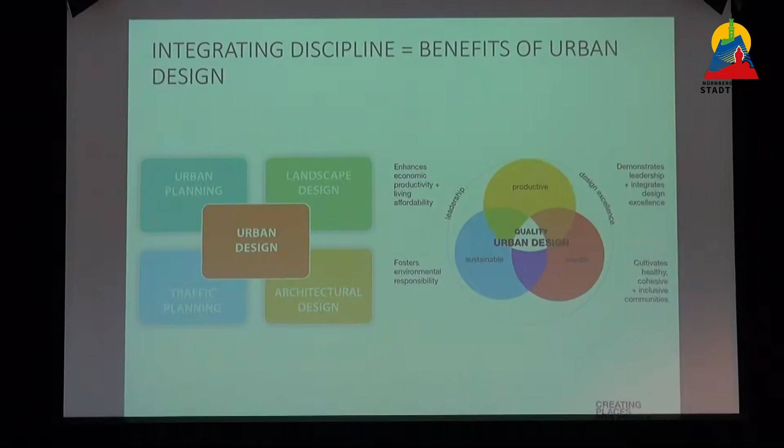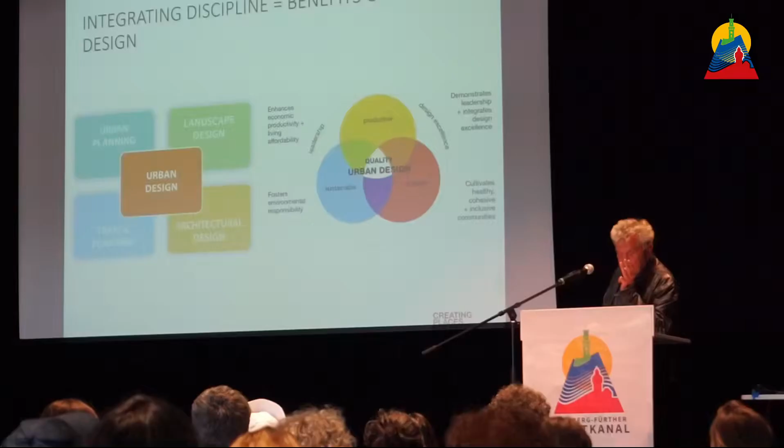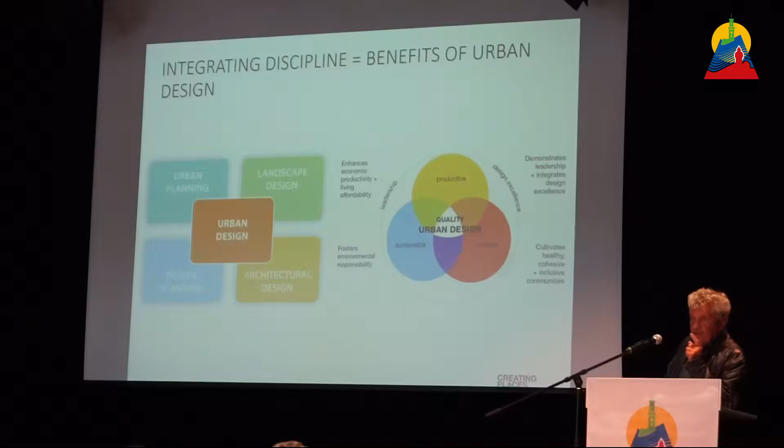So the approach to the restriction on car use in the city center of Ljubljana is specific. It's contextual, one can say. When considering the critical traffic situation, Ljubljana is still critical, you will see. There's a lack of an integrated public transportation system, which is different from Nuremberg, Fürth, for example. There are traffic habits, dependence on personal cars, the power of conservative traffic engineers, and on the other side, the ability of the community to accept changes, and of course limited financial sources, because Ljubljana is not a wealthy city.

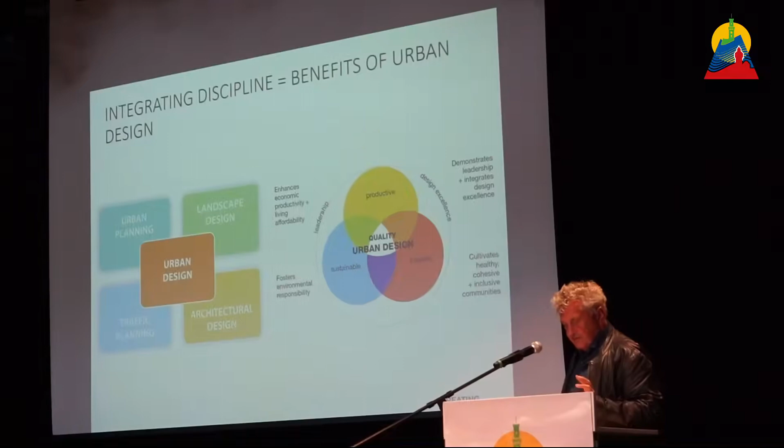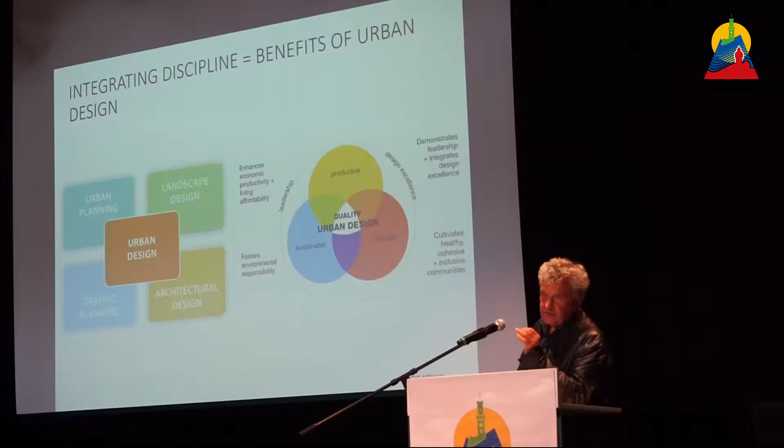So we are approaching the reform of the traffic system as a part of the renewal of the city center. So this is another goal, another aim. Our determination for this project was, and is still, based on believing public spaces are active surfaces that foster city life and urban transformation when they no longer serve only for motor traffic. So this is the precondition.

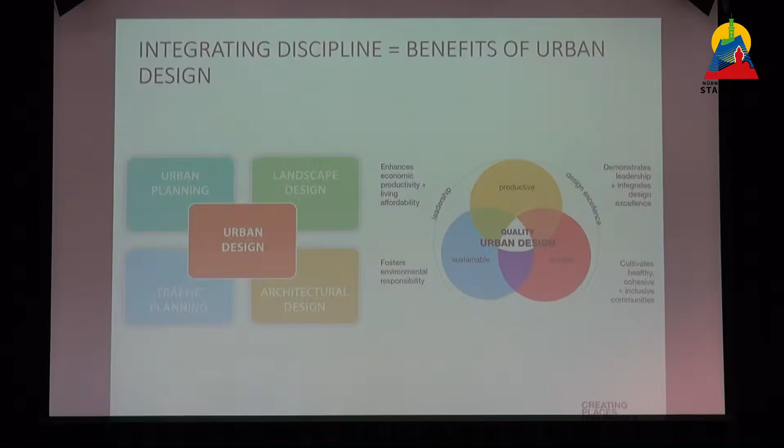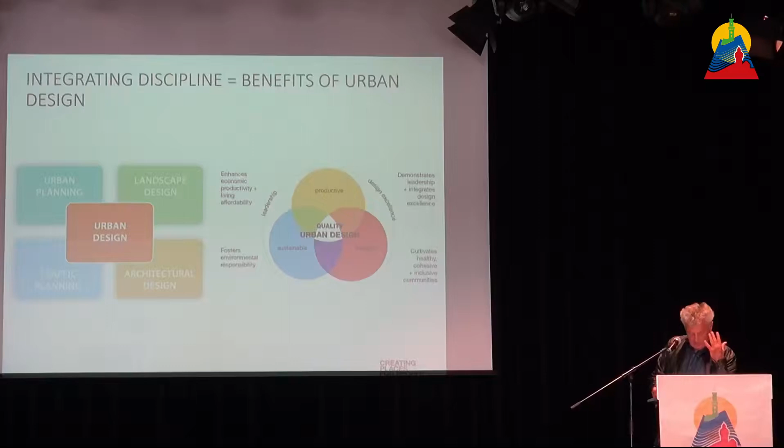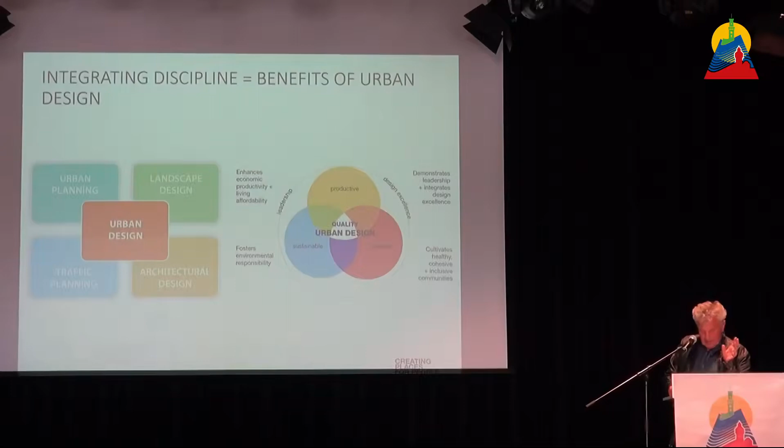To this determination, we implemented different urban design projects that have had an immediate impact on the traffic and consequently on the environmental situation in that place. So we are confident urban design is an integrating discipline that transcends planning and transportation policy, architectural design, development economics, engineering, and landscaping. Its scope is making connections between people and places, movement and urban form, and landscape and the built fabric.

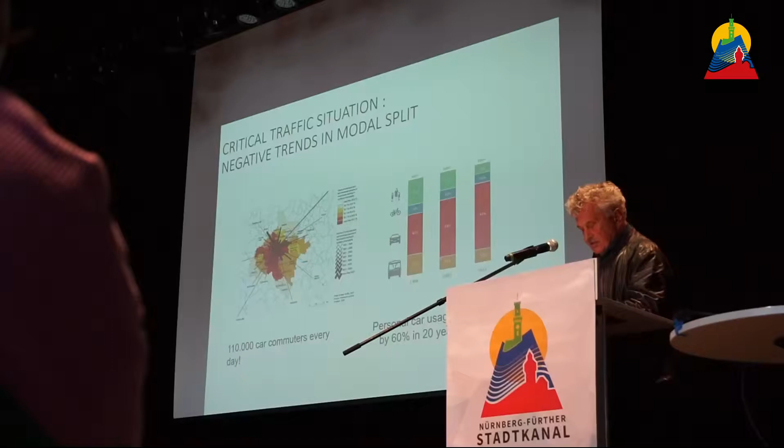So we are talking about placemaking, which is an approach to urban design that prioritizes people over infrastructure, thus creating a sense of place, by definition. Since urban design is therefore about the appropriate balance between development and conservation that is related directly to public health and welfare, we decided to use the rearrangement of public spaces as a catalyst for regeneration of the historical city center. So what is specific for Ljubljana?

The capital city provides the best employment opportunities and the largest shopping, leisure, and sports facilities nationwide. Ljubljana is therefore a large attractor for daily commuting to work, study, and shopping beyond the borders of the urban region. As a consequence, on average, around 110,000 cars enter the city, a small-scale city, every working day, whereas the peak number can reach 130,000 motor vehicles a day.

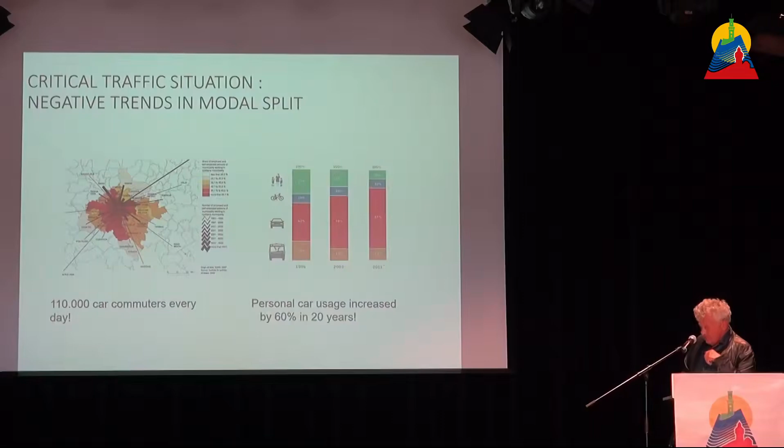So the critical traffic situation was the reason why the main strategic orientation of the municipal mobility plan, adopted by the City Council in 2012, aimed to turn traffic priority upside down, giving favor to walking and bicycling in order to balance the modal split, meaning that one third of trips would happen by personal cars, one third by public transportation, and one third by sustainable means.

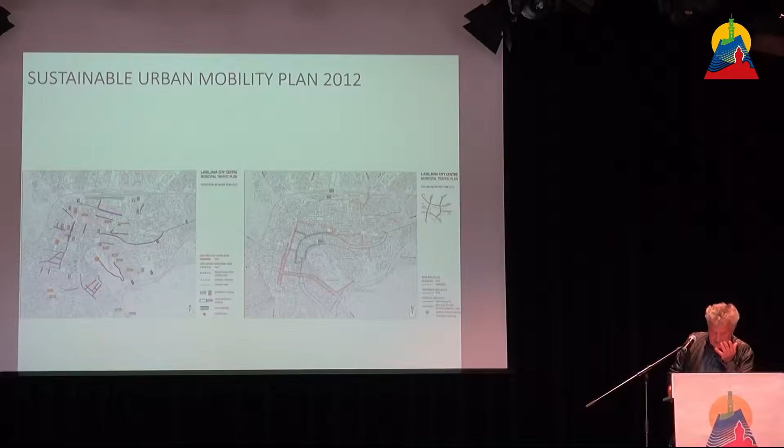So a systematic pedestrianization of the city center was a basic task and the most radical measure of the action plan, in which, as you can see here, 35 streets, squares, embankments, and other public spaces were designated as pedestrian areas. In 2017, the concept of a central ecozone, where the access of cars is limited, restricted, or denied, was revised with the support of this very important fact: environmental NGOs, not political.

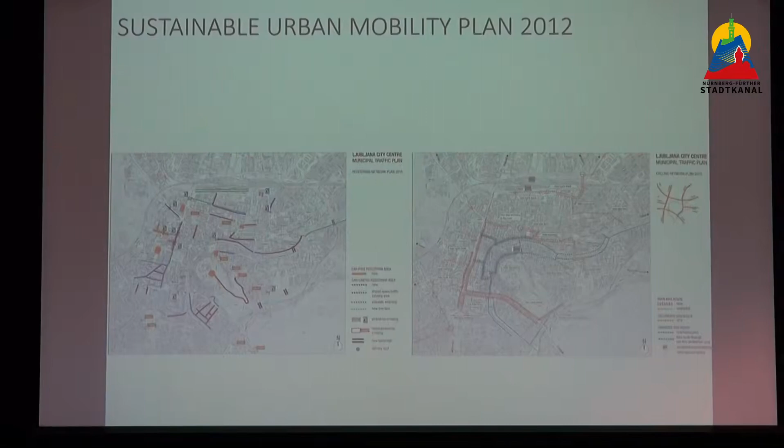This is maybe very interesting, even for you. This map shows the current state of different restricted traffic regimes in the area. In 10 years, namely, we managed to expand the central car-free or car-restricted area to 55 hectares. This is a huge ecozone.

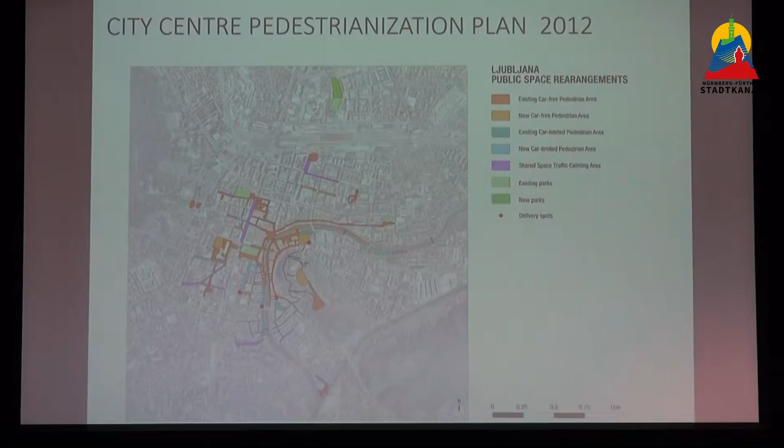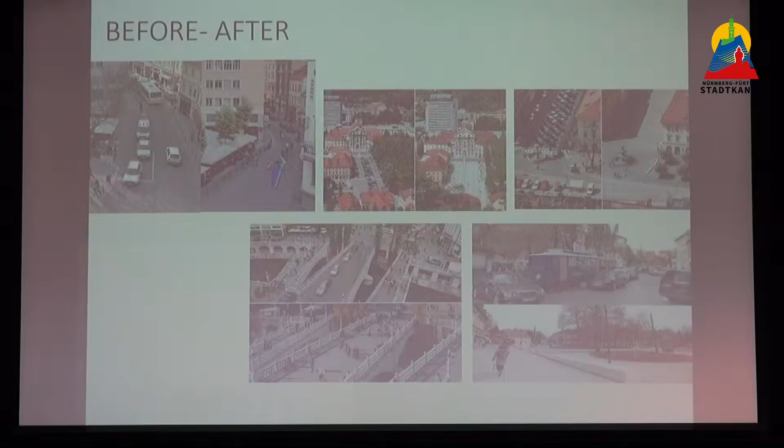These comparisons illustrate the drastic changes from previous critical traffic situations in the central area, where all the squares were completely occupied by parked cars, and even heavy city buses were passing the historic streets and bridges. The situation was really unbearable, especially for pedestrians, local merchants, and bar owners, not to mention traffic safety and air quality for the residents.

A precondition for restrictions: a new double-deck bridge was built to complete the inner city ring, allowing redistribution of incoming and transit motor traffic around the city center. This was a precondition.

This was the fourth project we realized. Circulating along the inner city ring, newly built garages allowed drivers to park there instead of entering the city center. This necklace of garages was a very important measure.

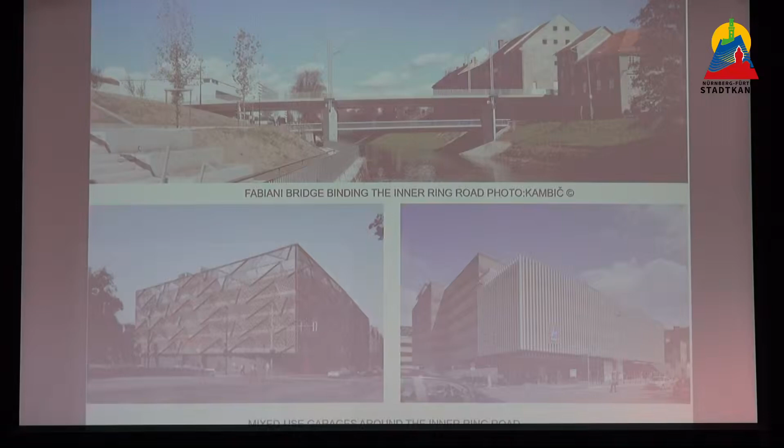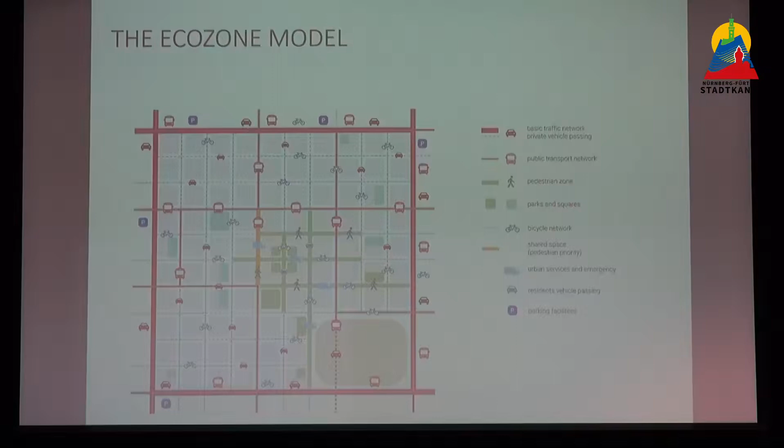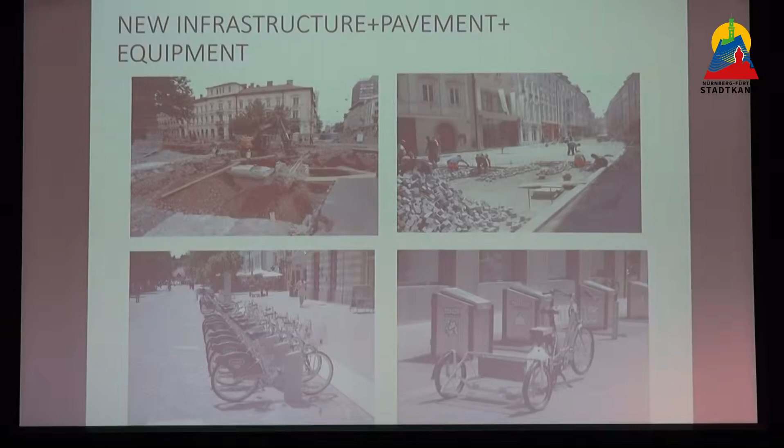After the inner city ring was completed, the rearranging of public spaces to pedestrian zones was followed by renovation of the complete underground infrastructure, including underground waste collectors, city bike infrastructure, replacement of paving, public lighting, urban furniture, and, importantly, planting new trees.

The rearrangement of reoccupied historic squares was carried out first. From the very beginning, we declared the network of pedestrian areas as a continual public space that pedestrians and cyclists could share, thus learning and experiencing cohabitation among them.

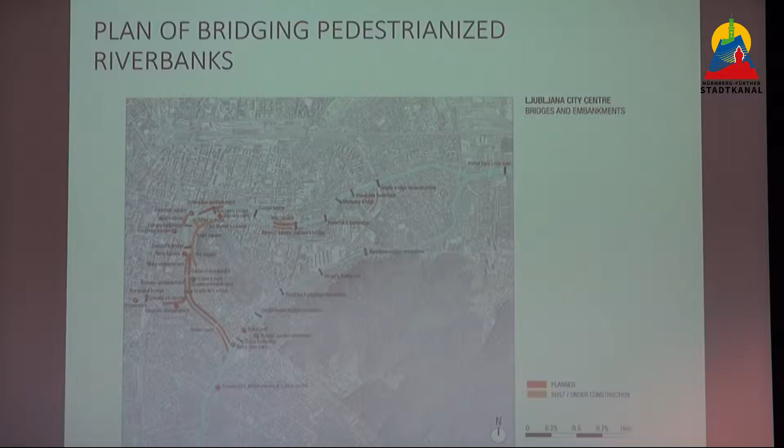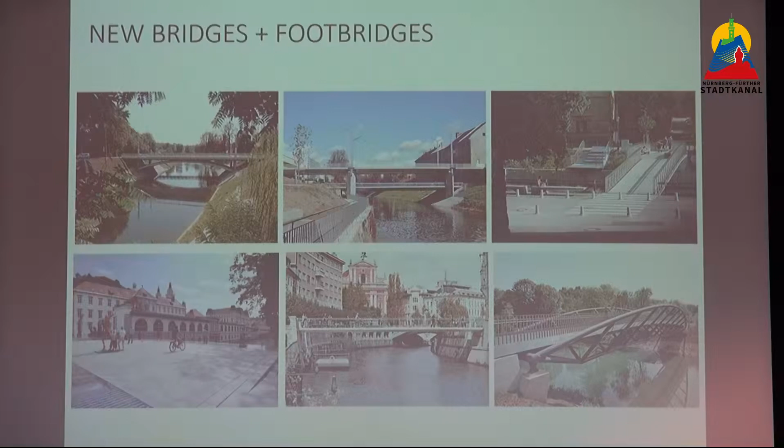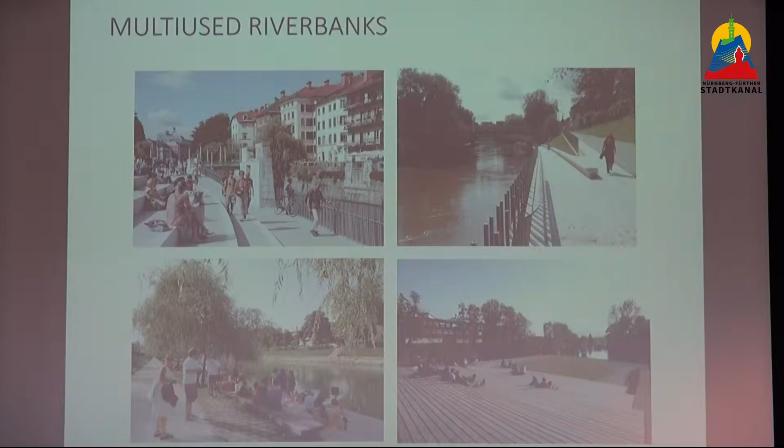Landscaping, planting trees and arranging parks along the river were part of the pedestrianization process. So you see some of the examples.

As expected, the civil initiative of inhabitants of historic old Ljubljana strongly opposed the restrictions on motor traffic regulation in the area, and demanded that the disputed decree, which closes them in a ghetto, not be adopted. So, regardless of the claims, the urgent situation forced us to start implementing restrictions, unfortunately, without the full consent of the locals.

It is not possible to reach full consent; it is utopia. It must be taken into consideration: the dependency of the community on cars on one side, and the critical environmental situation in the area on the other.

Regarding specific circumstances, we decided to implement measures step by step. This was the strategy, very pragmatic, in small portions, in small scales. Why? To give people enough time to test and adapt to changes from street to street, from square to square.

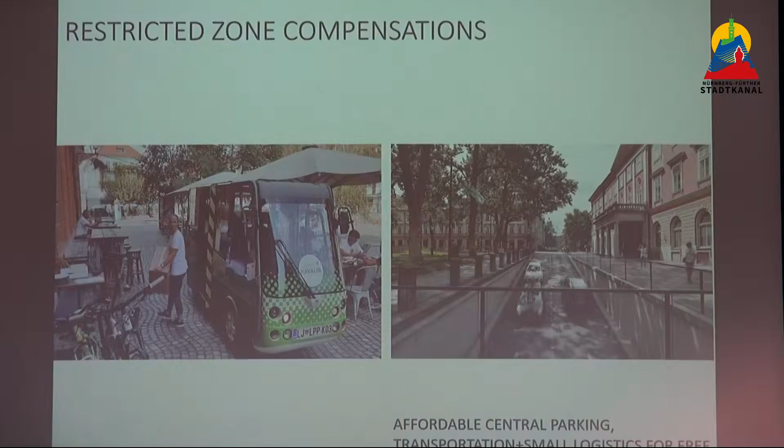To avoid people feeling deprived, we offered the locals some compensation for restricted use of their car. First of all, we enabled them cheap parking in a public garage we built under the nearby square. The price is one euro a day. That's cheap, no? In addition, we introduced an on-demand transportation system and small delivery service operating for free, on demand, within the car-free area.

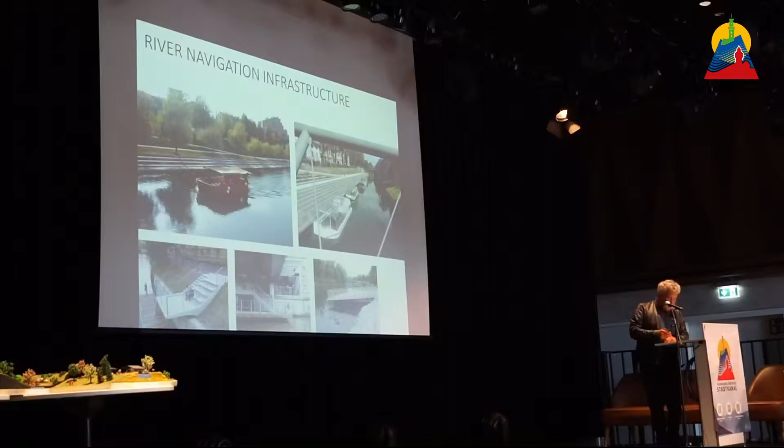This is, maybe, another compensation.

With the future public river transportation we plan to introduce soon, we also facilitate the locals within the restricted area. For this purpose, we built the main river port, as you can see here. It is small, of course, but it is the main one, along with boat stops equipped with platforms, gangways, and rafts, serving until now for tourist navigation.

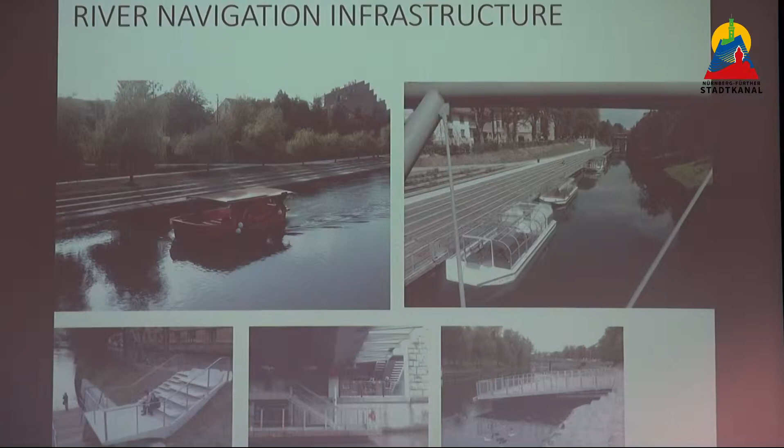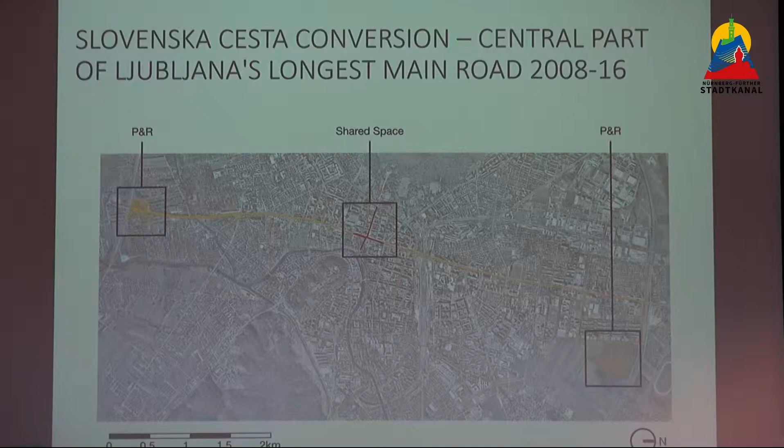So let me conclude with the presentation of the Slovenska cesta redesign story. Slovenska street occupies the central part of Ljubljana, the longest major road, and represents the main development axis of the city, stretching from the northern to the southern park-and-ride terminals on the highway junctions.

After many years of road widening and adding new traffic lanes, while narrowing the sidewalks to a minimal extent, the former avenue degraded into an ugly and polluted traffic corridor. Constantly decaying public life was the result of supporting the predominance of cars while completely neglecting pedestrians and cyclists on the street.

Narrow sidewalks forced pedestrians to use arcades or find different routes. Cyclist infrastructure was bad and disconnected, so besides its representative function, the street was dividing the most densely populated promenades passing through the city center to the Tivoli, the largest city park.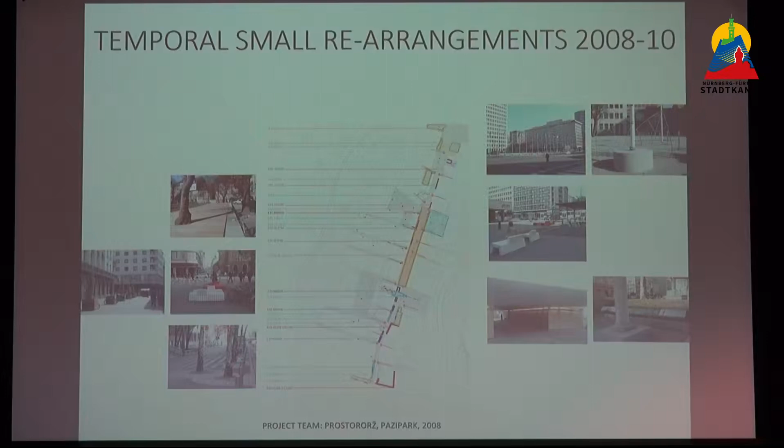From the very beginning in 2008, the initial small rearrangements were accompanied by staging of different street art events and social performances, aiming to prepare the people for the new shape, the new function of the street. So this is the demonstration method, not demonstrating, but demonstration.

With them, we tested how the removal of motor traffic generates reviving of public spaces, just the opposite of considering the traffic as a sign of vitality.

For example, this is one example. The central part of the road was covered completely with zebra-like graphic, which influenced the drivers to slow down instinctively.

Meanwhile, to moderate the impact of closing the shortcut through Slovenska cesta, we built an additional connection to the northern motorway, making it possible to reroute the oncoming traffic to the inner ring road for bypassing the city center.

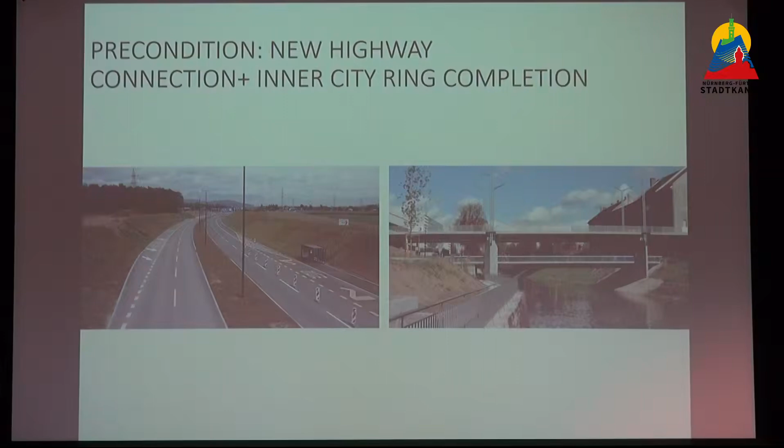In the next step, the city encouraged the Architect Association to invite innovative architects to propose different street modeling. This is temporary arrangement, provisional closings, and so on, to prepare some visions.

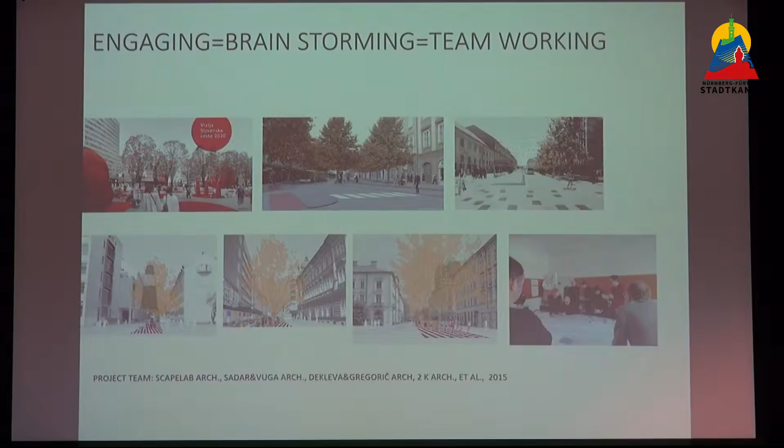After the public presentations and workshops, the city decided to continue with the project in collaboration with four offices that created a corporate design project solution.

On the central part, the 4-lane road has been redesigned into a 2-lane route intended for public transportation, running way, and occasional local delivery. So the former road surface has been flattened, and redesigned to be regulated afterward without traffic lights or signals, by the concept of shared space.

Before implementing the sustainable measures on the street, we took into consideration the ability of the community to accept changes. This was important. And what is more important, to experience them, to become more responsible, more tolerant, and more sensitive.

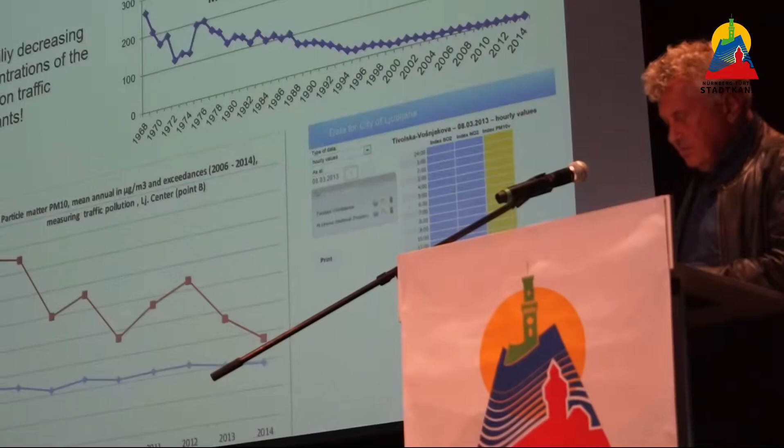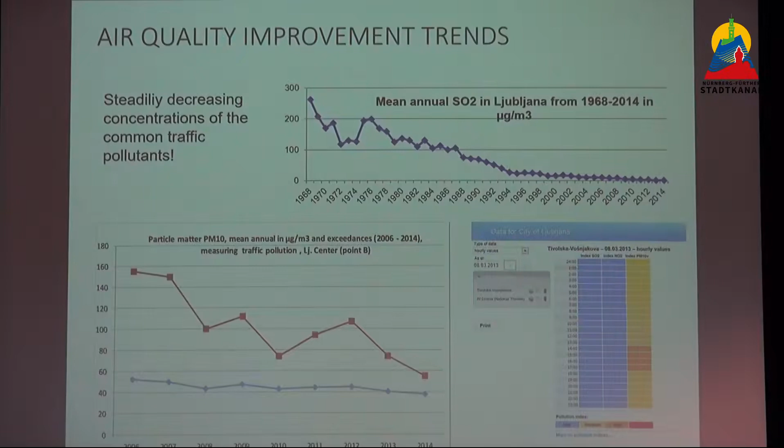So, how to end? The projects and measures the city has carried out proved that sustainability is a long-term process, a process of continuous improvement and experimentation. We need to never stop acting, never stop persuading people that sustainable mobility brings benefits for all and a higher quality of life. Thank you.

Thank you very much, Professor Koželj, for your insights into this absolutely success story, especially your insights into the design of the process, your strategy, how to convince everyone involved in your city. I think the result is wonderful and gives us a big motivation for our city, for our project, for our vision to come true. Thank you very much.